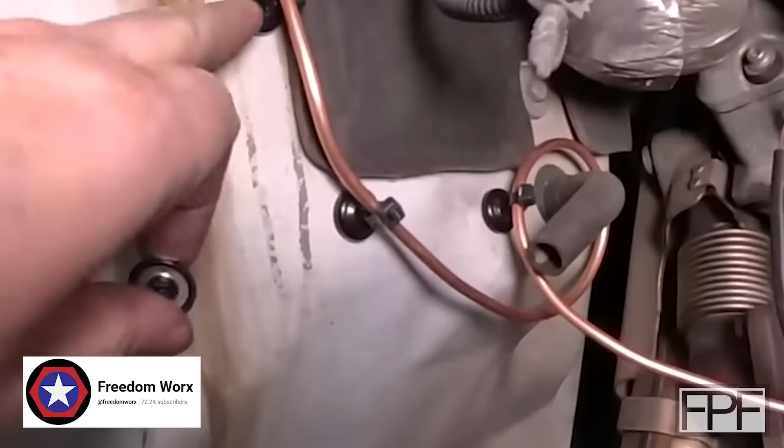These are really nice for plumbing and wiring. I'd like to share this with folks. It's a rare earth magnet with a loop on it for a zip tie to go through. So you can just stick it to the body of the frame, put a zip tie on there, and you're good to go.

So when I first saw that clip, my first thought was, I got to get some of those. I didn't even know those existed. And I like the idea that they're reusable as well. Now, he goes on to say that they're about $1 a piece, which isn't super expensive, but if you want 15 or 20 or 50 of them, obviously that's going to get kind of pricey. And while the magnetic base is reusable, you're still snipping the zip tie every time that you want to reposition one, or reuse it for something else.

And one of the reasons I liked that design is that you can cinch the zip tie on it, so the wire can't slip through it either. So if you're trying to temporarily route a wire and you don't want to have any slack in it, they'd be great for that. But again, even to move it on the wire, you're snipping that zip tie and using another zip tie. It's also sometimes tough to snip those zip ties on real thin wires without damaging the jacket on the wire either. So I thought, wait a minute, I think we can make this, and I actually think we can improve upon the design.

So I was thinking, what if we had a cylinder as a base that had a magnet in it, and it was threaded, and we had like a cap tightening on the wire, and we have like a slot through it for the wire to pass through, that you put the wire in place and then thread the cap on. You could tighten it down on the wire to keep the wire from slipping through, and to get the wire out, you just simply unthread the cap, take the wire out, and you can reuse the whole thing.

So in the early stages of me designing something, I will often just grab my digital calipers to just kind of help visualize the size of something. And I think the size of this is probably around, I don't know, maybe 15 millimeters. That's probably a good size. I don't think I would want to go smaller than that.

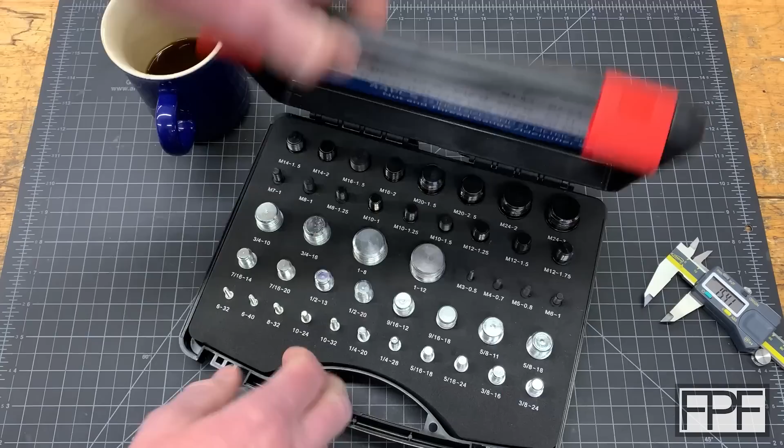And another thing that I will often use when I'm designing is this. This is a set of tools that's designed to figure out what thread something is on either the inside or the outside bore. So they're threaded on the inside and they're threaded on the outside. And these are not that expensive. I will link to the one that I have.

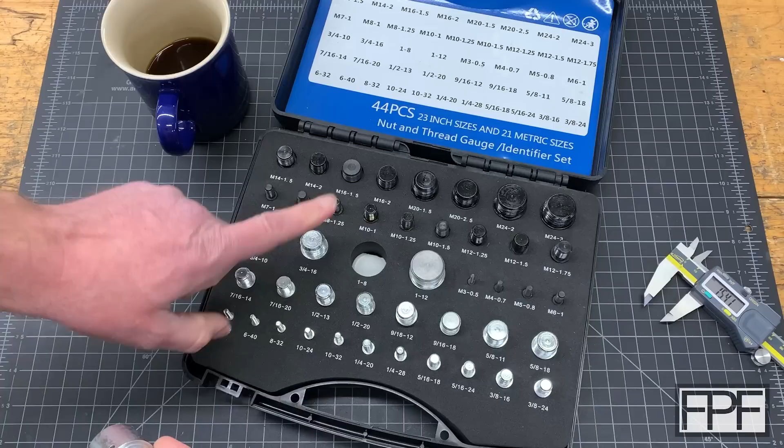I'll warn you, there's sets of these that look almost identical to this that are colored. Don't buy one of those. They're anodized aluminum, and aluminum tends to gall and or be damaged if you're using it in steel. This set is stainless steel, and for whatever reason, this set's actually cheaper than the aluminum ones. It'll often help me just visualize what thread I want on something when I'm designing it.

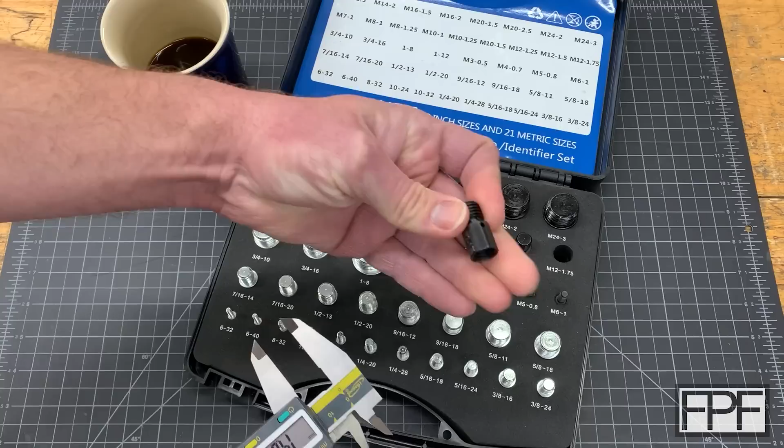So in this case, let's see, we're saying around 15 millimeters. So let's see, M10. Yeah, we could probably go bigger than M10. Let's try M12. That's a fine thread though. Let's go to a coarse thread, M12. Yeah, I think that should give us enough clearance for the threads and still have a nice thick wall. Actually, flip it around. What does this measure? Yeah, it's 14. That's probably enough wall thickness.

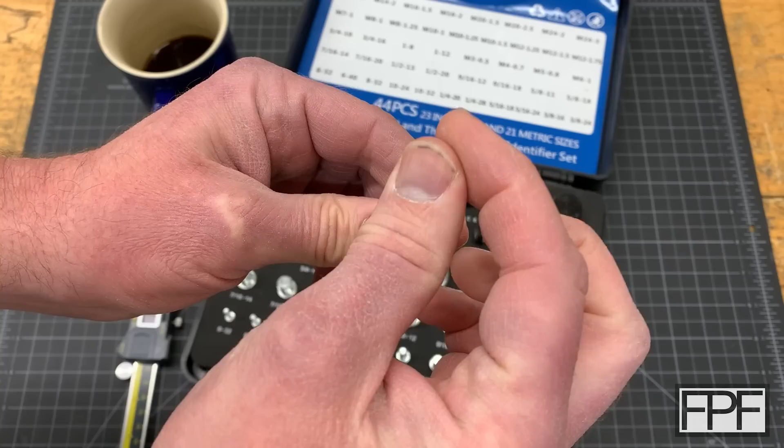So we could probably actually pretty much copy sort of this portion. So yeah, this actually helps us visualize it even better. So imagine the base of it, forget about the threads down here. The base of it is basically like this, except it has a slot down through it on this side and this side, so that you put the wire down in there, and then the top of it is basically a cap that's threaded like this.

The thread's down in and holds the wire. Yeah, I think that'll work. And then, yeah, we could actually press the magnets in. I was kind of thinking we'd have like a bore on the bottom face, press the magnets in from the bottom, but the reality is I have some 10 millimeter magnets. I think that's the biggest I have.

Yeah, so the inside dimension of an M12, like inside the thread, so not the outer thread dimension, the tops of the threads to the tops of the threads on the other side is over 10. So we could have a bore at the bottom that was 10 millimeters in diameter to press magnets into, and that should work just fine.

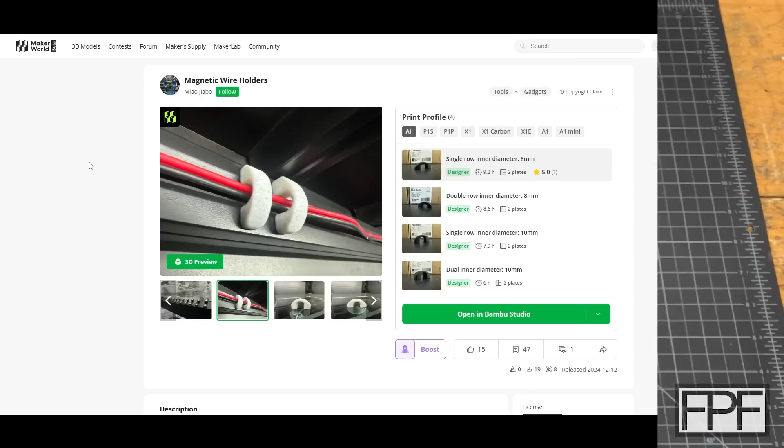So whenever I have an idea like this, one of the first things I'll do is actually just go out and see what other people have come up with, because a lot of things we do in this channel are really specific to a certain use case, but this one really not so much. I could see using these for all sorts of different things. So I took a look on MakerWorld, and there is a bunch of different designs that are somewhat similar, but none of them are exactly the same thing.

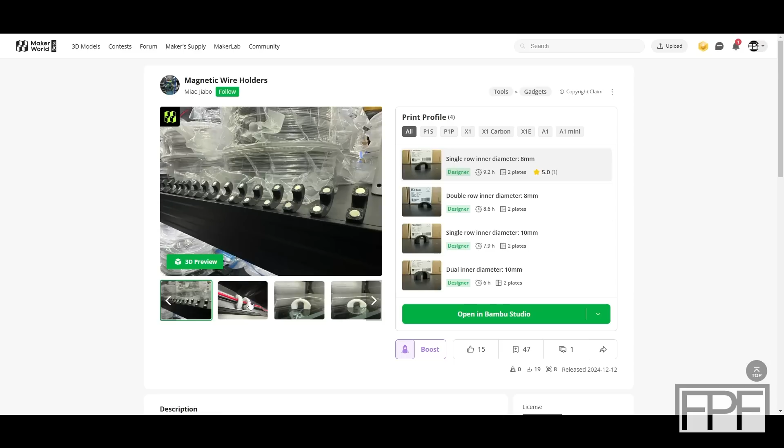This first one, I do like that it's very low profile. So it has sort of a horseshoe shape, shallow, and I think these are 6mm magnets in here. It looks like they're either just pressed or glued into place. The thing I don't like about this is there's no way to actually clamp the wire into place. So there's nothing stopping the wire from sliding through this left to right.

I would like something that is going to keep the wire from moving around. So for example, if we have plenty of extra wire over on this end and we're trying to keep it away from something over here, I don't want to be able to pull a loop through and have it hang down.

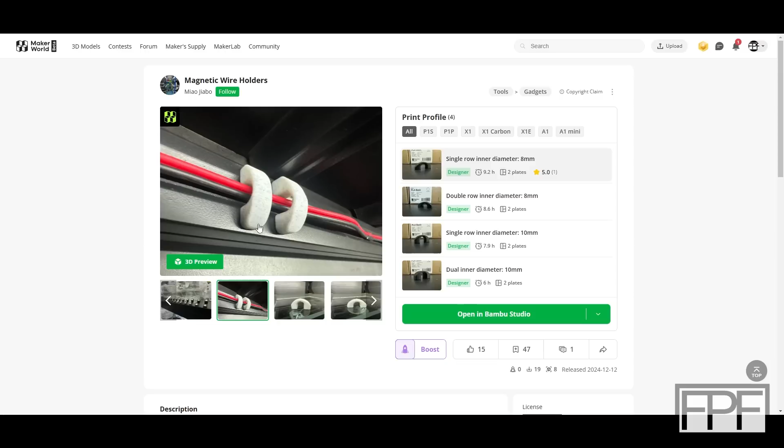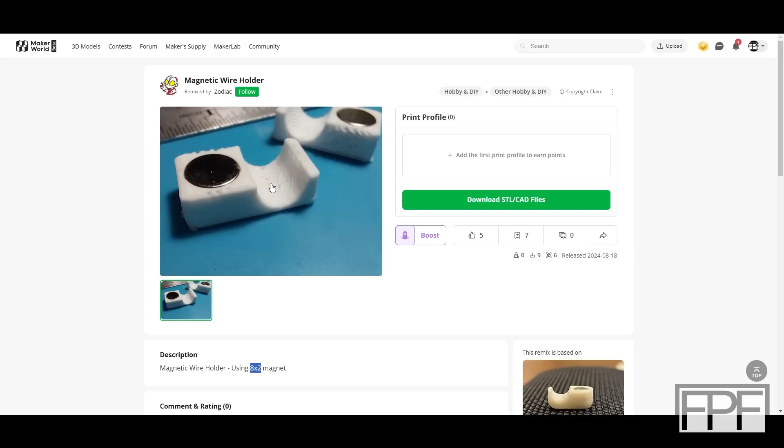This one is kind of the same concept, but just a single magnet. This looks like an 8x2 magnet. Also kind of a neat design, very low profile. Same problem, it doesn't actually keep the wire from sliding through. And with a single 8x2, probably not a tremendous amount of strength for either one of these.

This one is kind of neat, also pretty low profile, closer to what I was thinking. And it looks like it's designed for a specific wire size. This is a 5x2 magnet, a single one in here. Looks like it's probably pressed in. It's on the build plate, so it's a little hard to see. I'm assuming there's just a bore on the underside of one of these to press the magnet into.

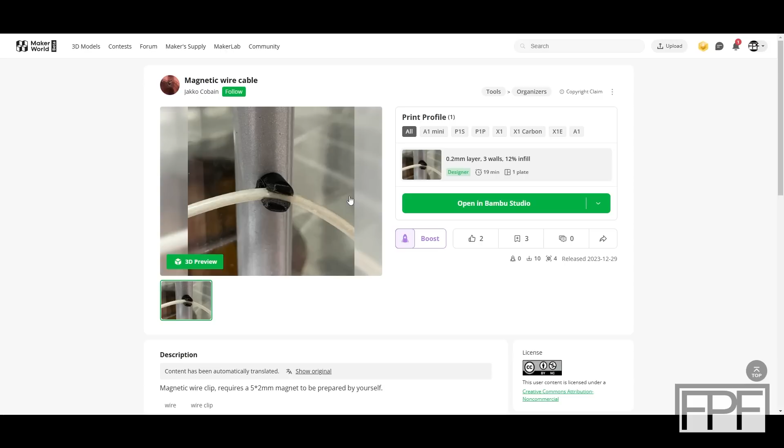And then I guess we would need a design for each size wire so that it kind of clamps in there and holds. So this one would keep the wire from slipping left and right, which I like, but we'd need a separate design for every single wire.

Now, when I first clicked on this one, my initial thought was, oh, this is perfect. This looks like exactly what I was thinking. I don't need to design anything. But this one actually suffers from the same problem as the other ones, and I don't know if that was intentional in their design or not. If we open up the 3D preview, at first it looks like, okay, our wire goes through and then we clamp down on the wire with this cap.

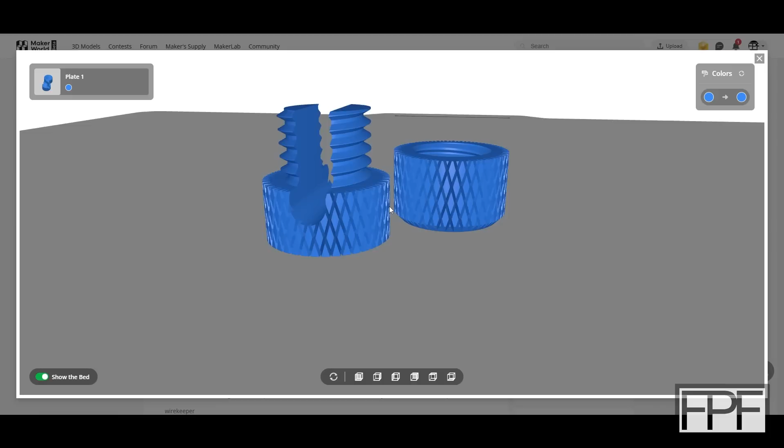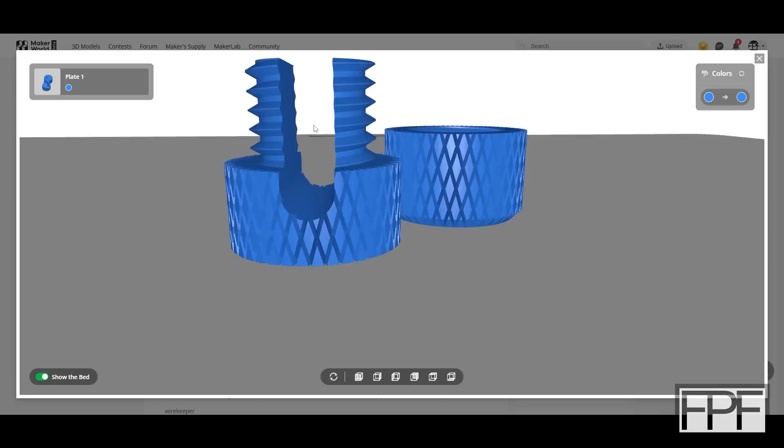But if we look at the width of the bore that makes up the bottom of this slot, if we put a wire in that is smaller than this bore, the face of the cap here is going to hit this face here and never tighten into the wire. And even if we put a wire in that is as wide as this will permit, so imagine a round cross section of a wire, if it fits through the slot down here, it's still not going to extend past this face here, so we're never actually going to tighten down on the wire.

Now I thought, oh, I could modify this. I could adjust the geometry of that slot, bring this up a little bit so that, imagine this curved face down here instead sits up here or sits all the way up here.

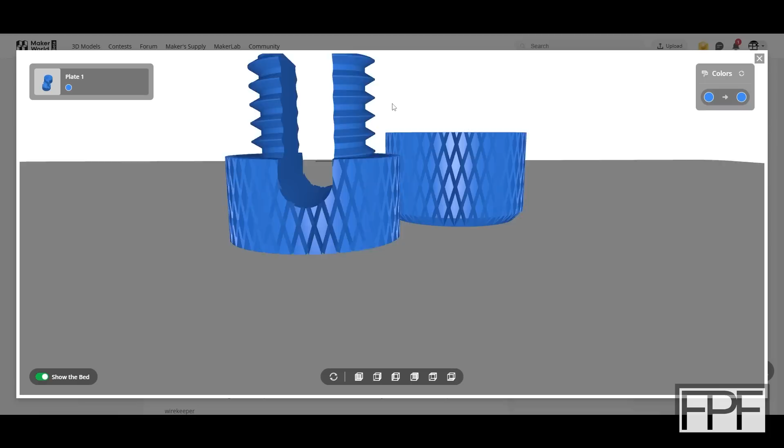Maybe we don't have that curved face until down here, so we don't actually have anything through this geometry down here. But if we do that with this design, this outer face here is going to press on the wire on this side and this side on not a whole lot of surface area, and we're going to be pulling it this way over here and pulling it this way over here,

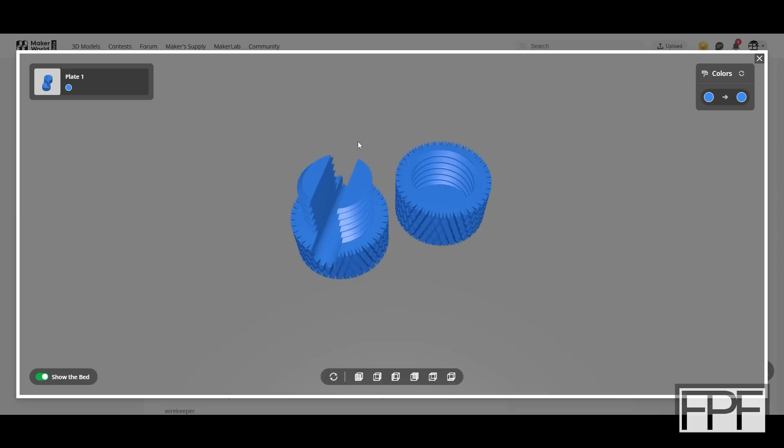which I think has a higher chance of damaging the wire versus doing this in reverse, which is what I was thinking, where the base has the female portion of the thread and the top that tightens down is the male thread, and this would be a solid face up here. So we'd be pushing on the wire, clamping it in place with this whole solid face. That should reduce the chance that we damage the wire and also gets rid of our problem of trying to pull the wire one way over here and pull the wire the other way over here.

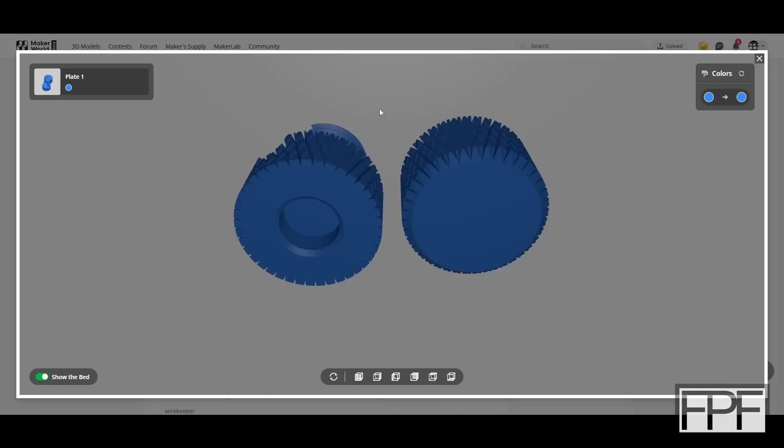I also don't see any reason to have the knurling on the base. So as close as this was, I think it still makes sense to just design our own from scratch. They also used a small single 6mm magnet, probably working around what they had. There's a lot more real estate here. I want to use the biggest magnet that we can, and we'll put 2 of them in there. We're going to use those 10mm magnets. So, all right, let me get started on the design, and I will bring you guys back.

All right, and here's where I'm at with the design for this so far. And yeah, it's incomplete, but there's a reason why. I'll get to that in just a second, but let me show you where we're at so far. So down here at the bottom, we have a bore for 2 of those 10mm magnets to get pressed into. And up here at the top, we have M12 thread for some kind of cap to screw in here to hold our wire in place.

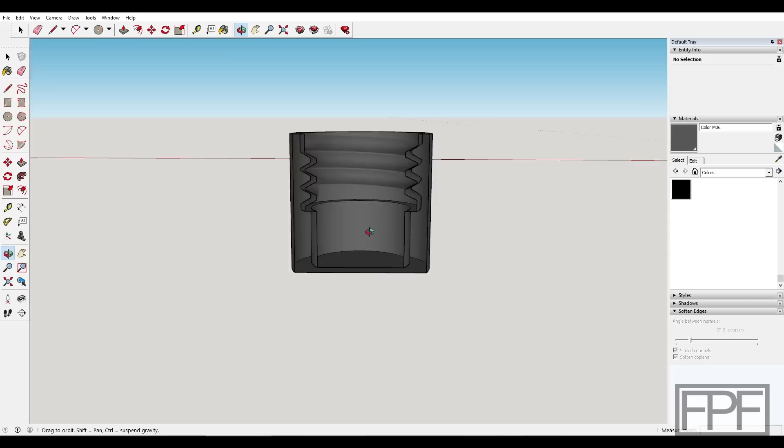It's probably a little easier to understand if I turn on a section cut. Yeah, there we go. So this is the bore down here at the bottom that the 2 magnets stacked are going to press into. You can see we have a small gap down here. This is 0.5mm from the bottom face of the bore for the magnets to the bottom face of our actual total part.

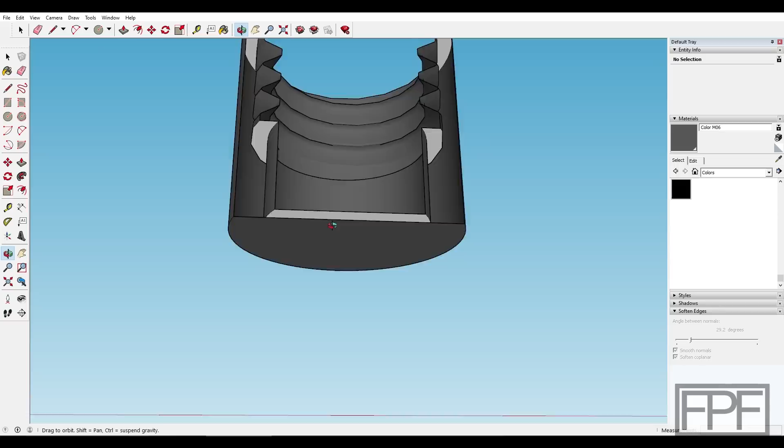And that 0.5 millimeter should not affect the magnetic force too much, but will make it really easy to keep the bottom of this guy clean, particularly if we're using it in an area where we're generating metal dust or metal chips, something like that. And then up at the top, we open up into essentially a wider bore with that M12 thread. Now, you're probably noticing we're missing that slot that we actually want to put the wire through.

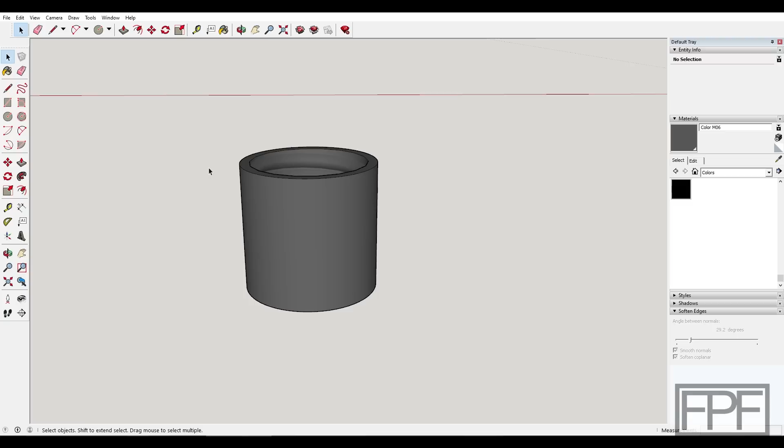And this is a great opportunity to show you guys how easy it is to modify models that maybe you've generated in a CAD program that doesn't give you the easy ability to do that. It is, in this case, quite difficult to have a nice clean mesh going through threads because there are so many faces on these threads. But let's just say that this is a model that you grabbed off of MakerWorld or Thingiverse, whatever. And it works for you perfectly aside from maybe one small problem.

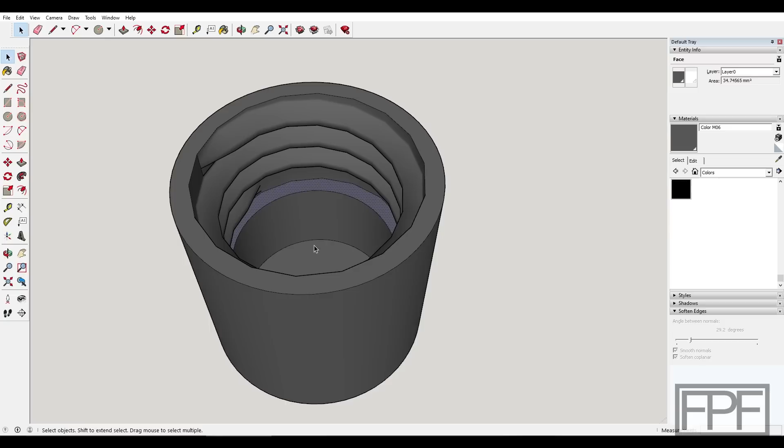In this case, we want to put a slot through this. And that slot is going to extend all the way down to this face down here, basically the top of that bore. The wire should be able to pass through a slot here that sits all the way down to where those magnets are pressed into the bore, and then we screw the cap in and hold the wire in place. It'll make more sense when you see it finished. But we can actually do that with some simple objects, in this case, a cylinder and a rectangle, right in our slicer. Let me show you.

All right, so as a first step, I've gone ahead and imported that part as an STL here into Bambu Studio. And these steps are going to be the same with Orca Slicer. If you're using a different slicer from Bambu Studio or Orca Slicer, these steps are going to be a bit different, but you should be able to find these features within pretty much any modern slicer. We're going to be doing all this work at the object level.

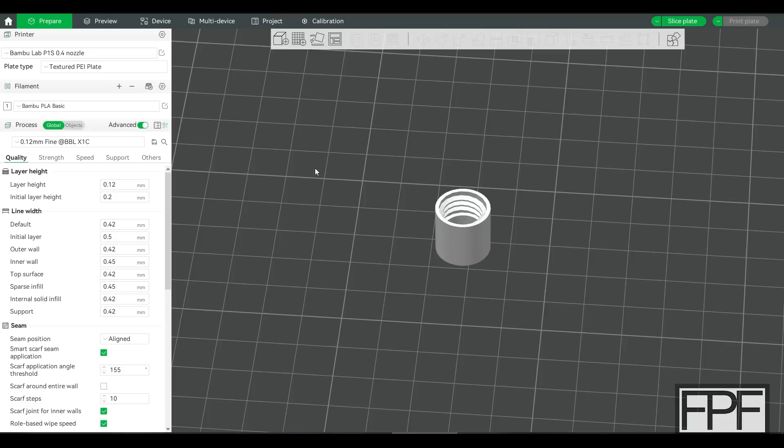So first thing I'm going to do is click on Objects over here. And you can see we have just a single STL. That is this guy right here. So the first thing we're going to do is add some other pieces that we can work with here in the slicer. So I'm going to right click on this and I'm going to hit Add Part, and we're going to add a cylinder. And by default, it kind of sets it down right next to our first part here.

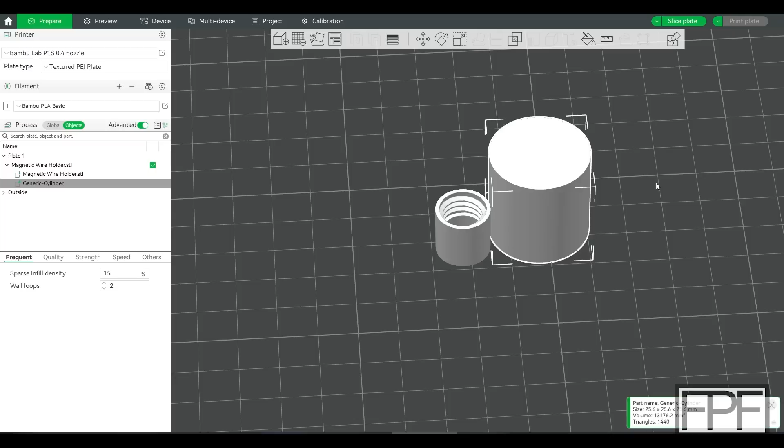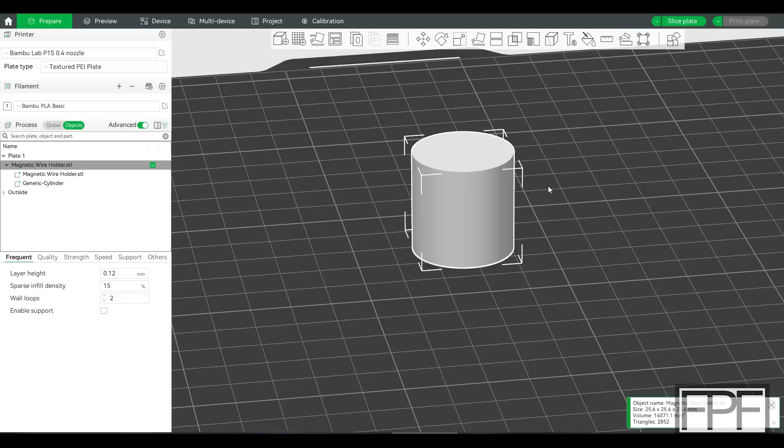So if I click on this and we check our position, if we just set our object coordinates all to 0, should get this guy down in the build plate centered up in the exact same position as a first step. Now we need to make this guy the right size because remember, we're going to use these other parts that we're adding to modify our original design, this Wire Holder.stl.

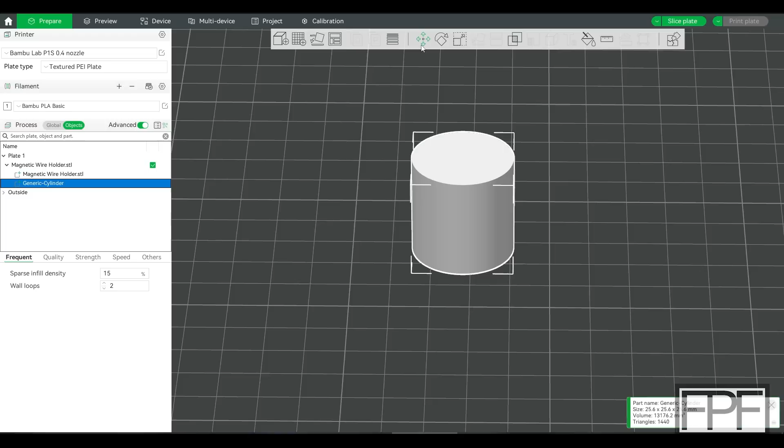So if I click on this guy, you actually got to be really careful here because anytime you click on any part, they're on top of each other now, so it's hard to tell. It selects everything by default. You've got to make sure you have just the piece that you want to modify selected. So I'm going to click here on generic cylinder, and now let's go to scale. And you want to make sure your uniform scale is turned off, and we want to set our X to be 5 and our Y to be 5. That should give us the right dimensions for that slot.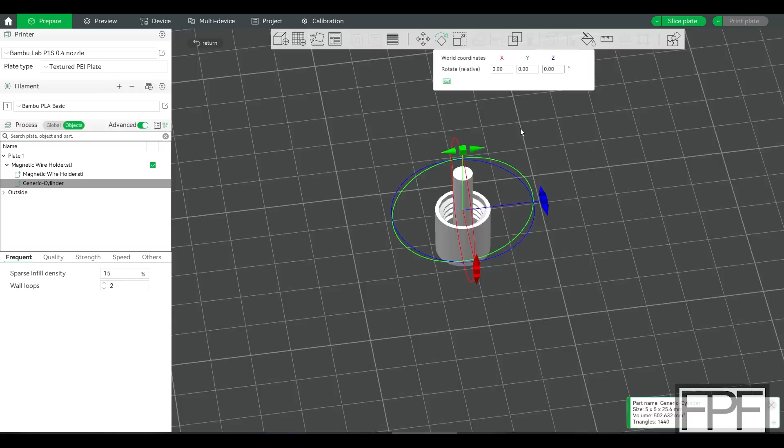Now you'll notice it's not in the right orientation. We can fix that pretty easy. If we just go to rotate, see, we can either rotate this, I guess, in the X or the Y. We want to turn it 90 degrees. Let's do the X. Okay, that is starting to look better, but it is too high. So again, making sure we have just the object that we're trying to modify selected. Let's see, we want to move this.

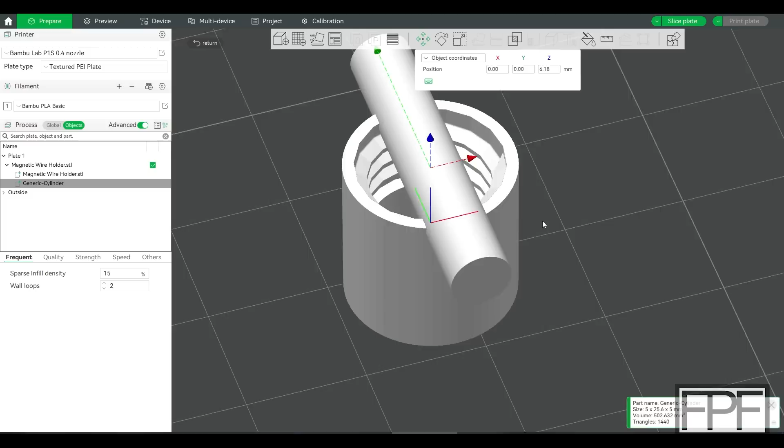We realistically want the bottom of this to sit right at the top face of that bore at the bottom for the magnets. And let's see, we had 0.5 millimeter and then 5.5 for this bore. So we want this to sit right at 6 millimeters, but the object itself, the coordinates are going to be from the center point. So we need that to be at 8.5, I guess. Let's try that. 8.5. Now that is still too high. You know what? I think we need to actually set that in world coordinates for the Z. Okay, that looks like it's at the right spot.

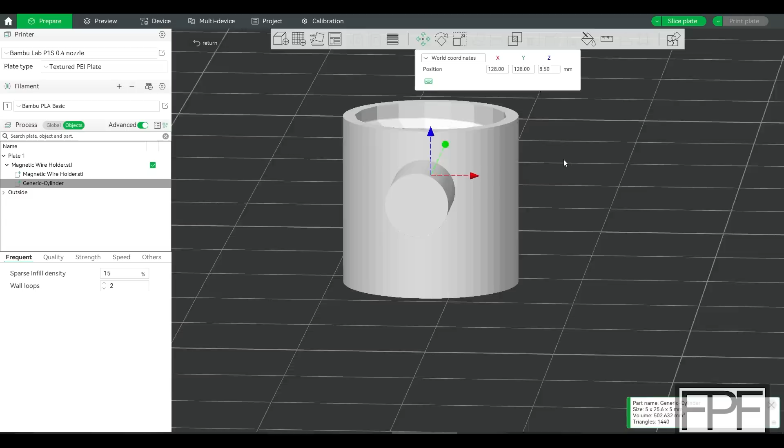An easy way to tell is actually just to slice it. And if we go down, we can see, okay, there is our top face of that bore. And yeah, the very next layer starts our other part. So that looks good. Now, we don't want just this area down here to be cut out. We want to cut out this area up here as well, but that's okay.

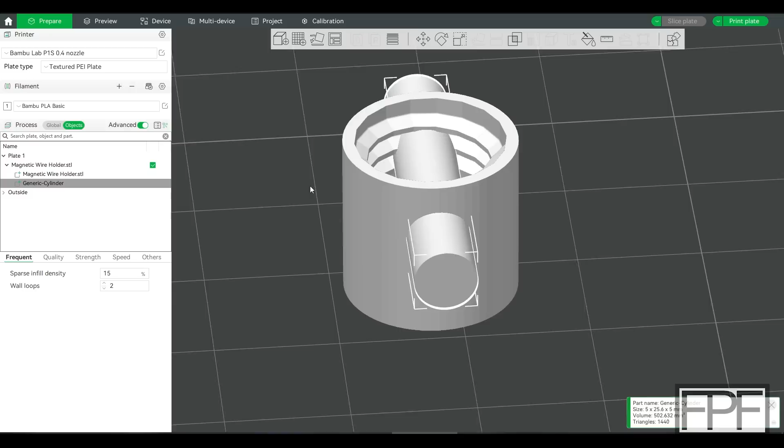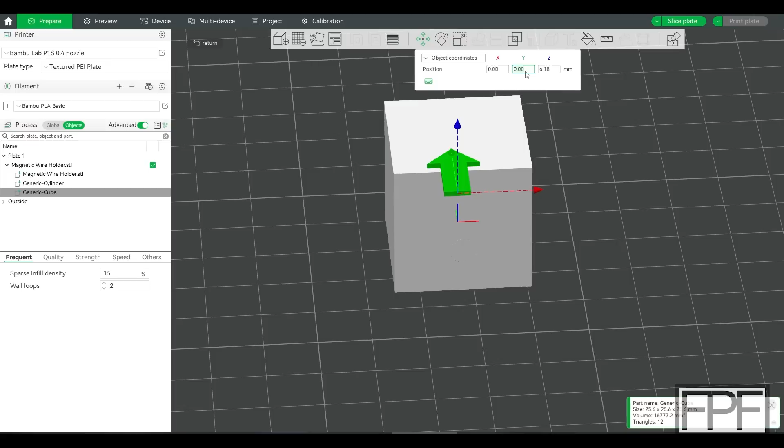We can do that. So if we click on our wire holder again, right click, and actually we got to be up here on the STL, add part, we'll add a cube, and we're going to start by doing the same thing here. We'll set our object coordinates to be 0 on the X and the Y. We'll go to scale, and we want our X to be 5. Yeah, that looks right. Now, it's not in the right spot, but that is okay. We could do it with the coordinates here, but this is one we actually don't need to be that perfect on.

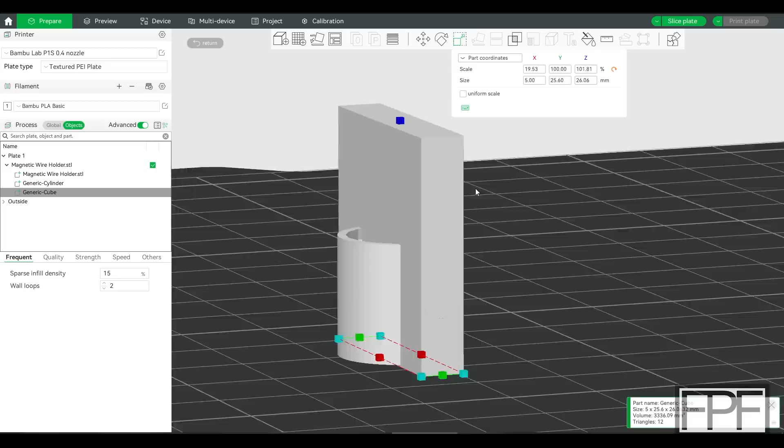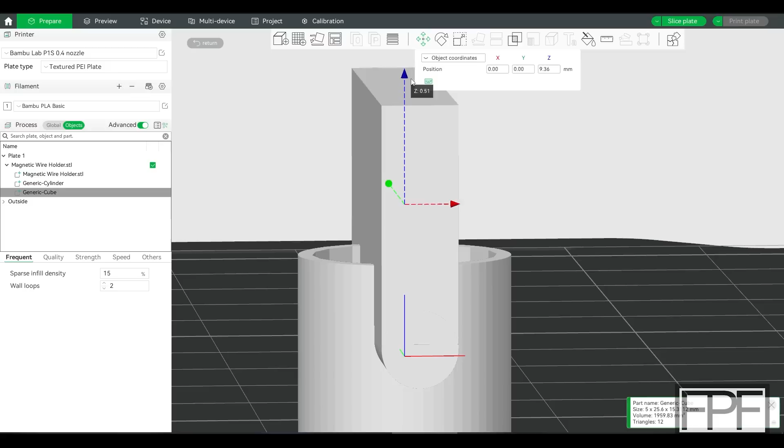Let's see, Y is, oh, we're still on scale, that's why. So we want to go to move, and I can actually just drag this guy, get just the cube. This is one we can actually do visually. I mean, we could figure out exactly what number we need that to sit at, but you see anywhere sort of in this region here is probably going to do it for us. And this is another one, again, we can verify just by slicing it.

And we can see now we have, because the accuracy is only within the line width and the layer height, so we can see that we are right on. There's no steps on either side here. Now I hear what you're saying. That's not what we want to print, Rich. That's not going to work for us. We essentially need to knock out this.

Imagine if this was the tool path, and say if we were machining this. So if we go back to prepare, this is where the magic happens. I'm going to click the whole thing. So now we do want all the pieces selected. And we're going to go up here to Mesh Boolean. And we want the difference between two of these parts.

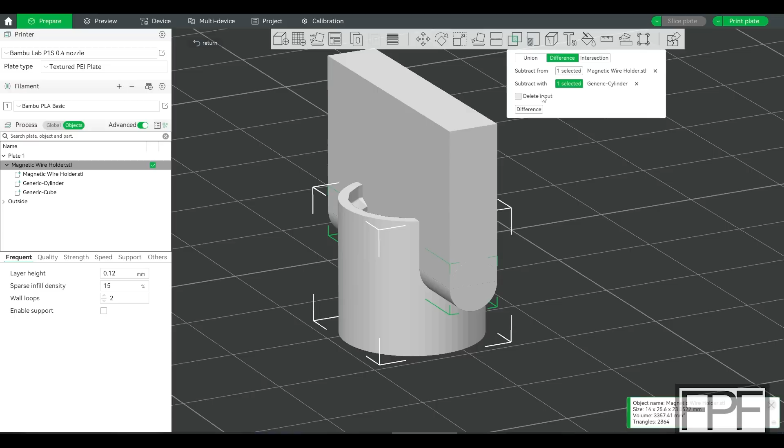So subtract from. This is where we're telling the slicer what part we want to have less of, basically. So we want to have less of this main one down here. So if I click on this, it actually shows us the parts. That's perfect. And subtract with. So this is what part are we using to make the subtraction from? So we're actually going to do this twice because we need to use the cylinder and then the cube as well. So we want to make sure we turn on delete input.

Click difference, and look at that. We've already done part of our work here. So we'll just do this again now, subtract from. We're going to subtract from this. We're going to subtract with that cube. We've got our delete input turned on and hit difference. And now that's looking pretty darn good. Let's hit slice plate, just make sure. Yeah, I believe that is exactly what we are looking for.

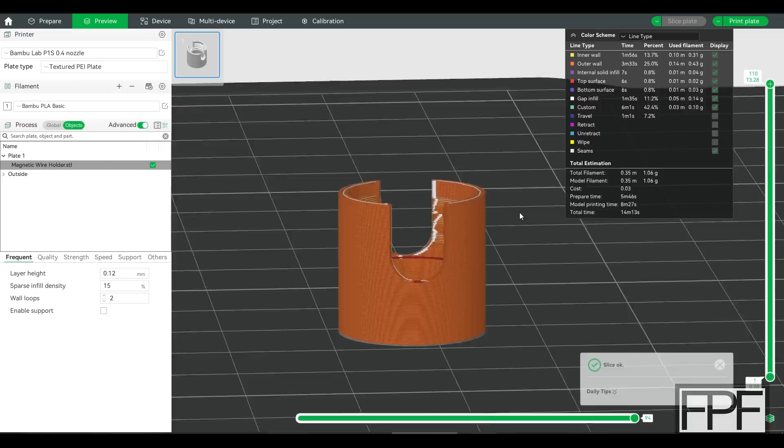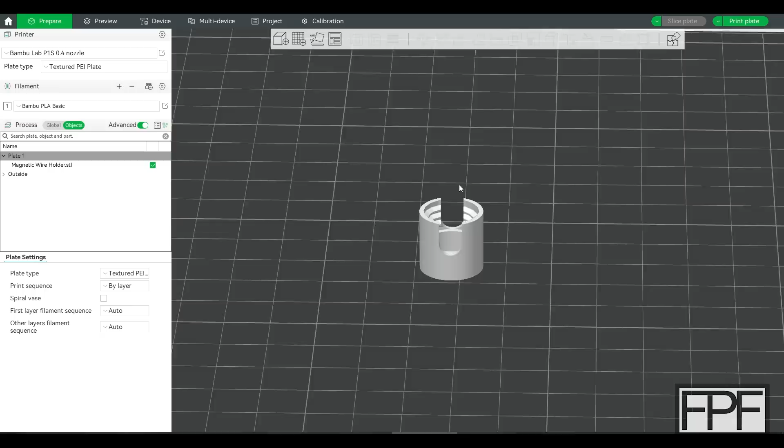Now, some of you might already be opening up a new comment to tell me that you can do that with modifiers and it is a little bit less work than going through the Boolean operations. And that is true to get you, I'm not going to say printable model because it's not really a model. You can print from that, but the magic of doing it this way is you're really kind of doing modeling within the slicer, which allows you to now click this and go to File, Export all objects as one STL.

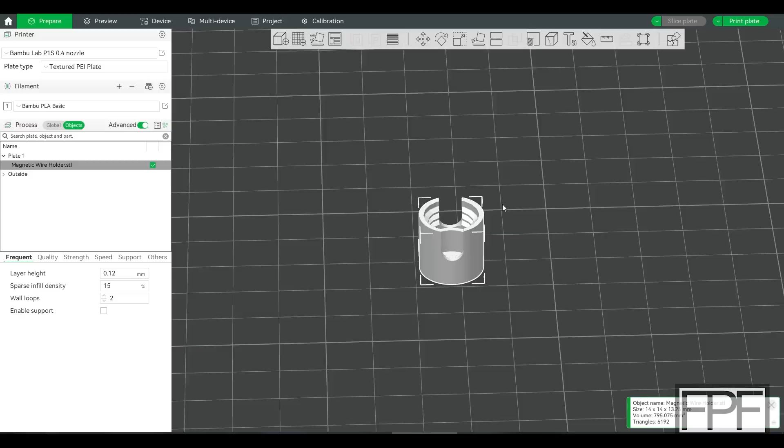And let's see, here's what we imported, this magnetic wire holder. If we go and we add, call it fixed. Now if we add that, look at that. That's actually an STL. That's not like a saved file here in Bambu Studio that we could print from again. That's actually what the STL now is. It is the modifications built into the model, all as one solid part.

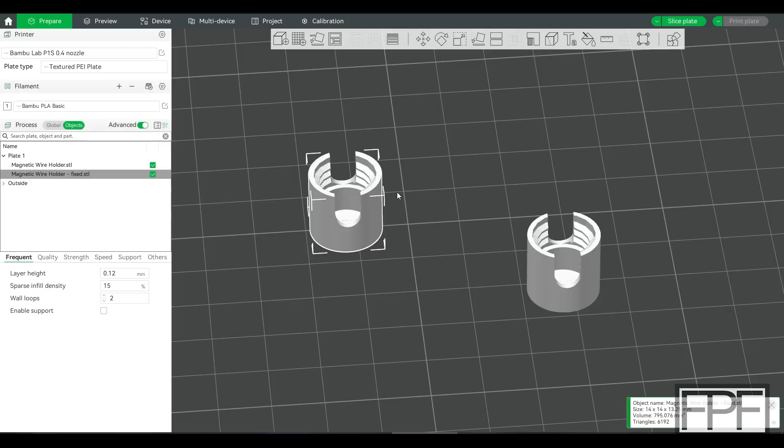So that enables me to share this with you guys. Or you guys, if you're using the slicer to make modifications like this as well, you can actually get that exported as a solid part and share it with other people, and they can print that versus you trying to share your slicer settings and everything all in one shot. It gives you a solid model that you can export.

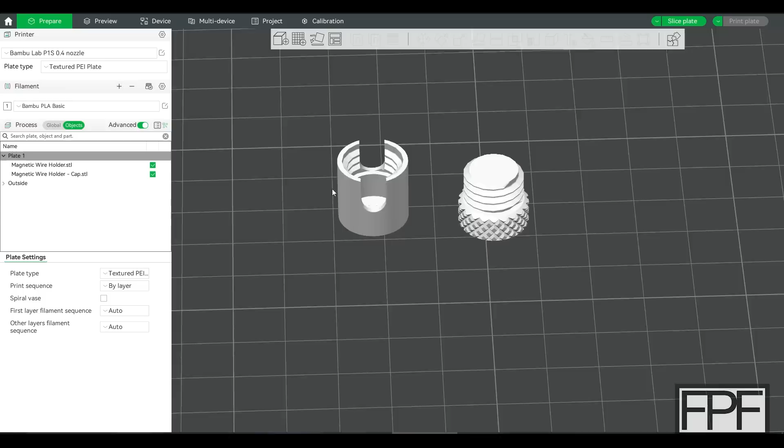So I have already done the same thing for the cap. So I'll pull that in, and now you guys can kind of get an idea here of how this is going to work. This guy's obviously going to be flipped over, and it'll thread into the top and should then tighten down on whatever wire we're passing through here. And the magnets will press into the bore down here.

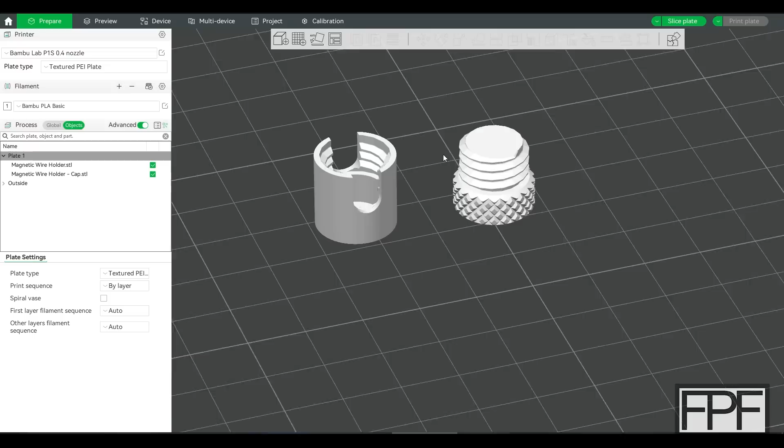So another thing worth noting, when you're doing threads like this, I could print them like this and it might fit. It's probably going to be really tight because both these are a perfect M12 thread that has very minimal clearance built in. And if we were interfacing either one of these with another component that was like a tapped hole in steel or something like that, it'd probably fit just fine, or a bolt would probably thread into this one just fine. But because we're 3D printing both of these and these tool paths are not going to be perfect, we're going to need some extra clearance.

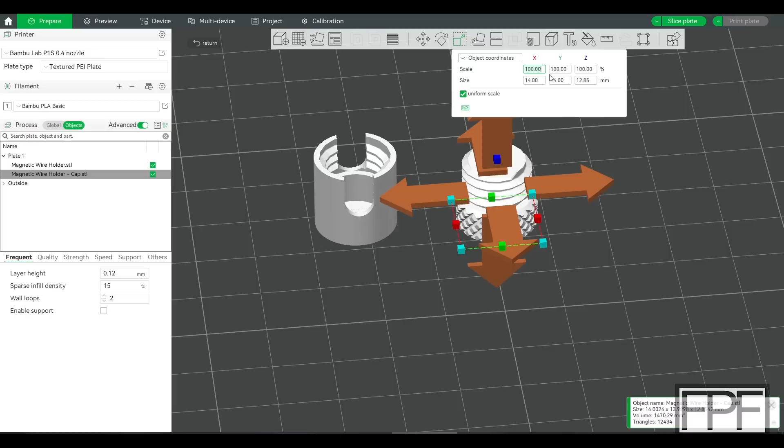So I'm going to click this part and we'll go to, let's see, scale. And now I'm going to turn uniform scale on. And we could just do a percentage. I would start with probably taking somewhere between 3 and 5% off. Let's try 96%. And that's just shrunk that whole thing to 96%, which actually, you know what, now that I think about it, we don't want to do that because we don't want our Z to change. That would actually change our thread pitch.

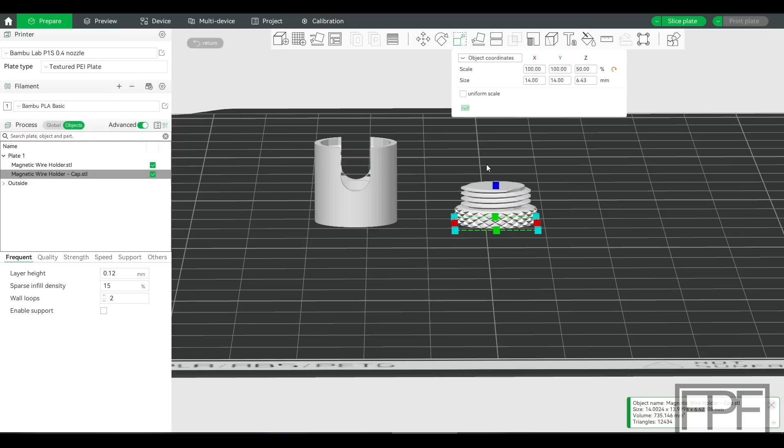So we want to turn uniform off. We want to leave Z alone because think about it, if we shrunk that down here, I'll exaggerate it. Yeah, we have now a completely different thread pitch that's not going to align with this guy. So we don't want to do that. We want to leave that alone. But we do want to change X and Y.

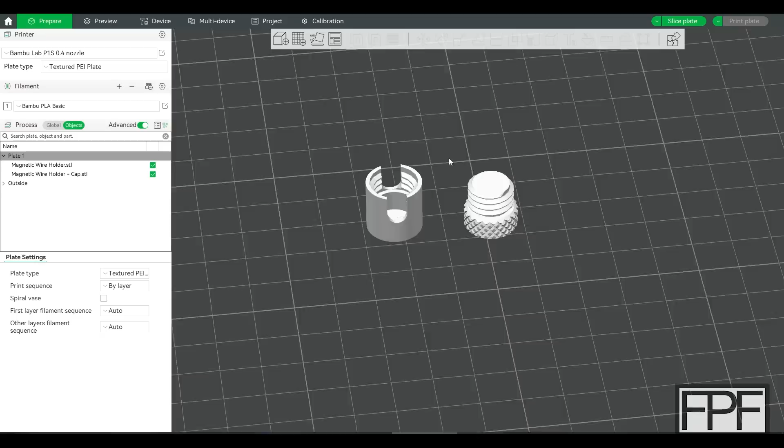That's going to change our clearance for this thread. So we'll make this 96%. Now you can see that has shrunk in the directions that are going to control our thread fit, but it's leaving our thread pitch and the overall height of this alone. So, all right, I think it is time to print this and see if our magnets are a good press fit and see if these parts actually fit together.

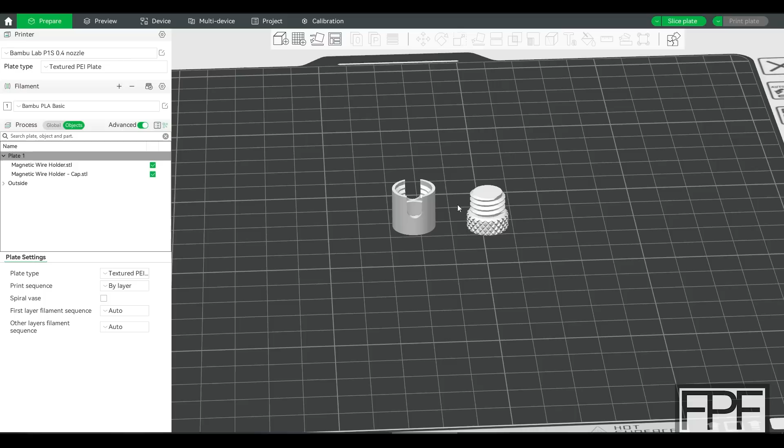So it's tempting to print a bunch because I do want more than one of these, but whenever you're printing components that are designed to fit together, don't do that. Print one, make sure it fits before you start filling up the bed and creating a bunch of waste if they don't fit. So I'm gonna do just that. I'm gonna print one of each of these and I will bring you guys back.

All right, and our test pieces are done. Let's see how these thread together. It starts nice. It's maybe a little snugger than I'd like, but I don't want to loosen it up anymore because I don't want this to free spin either. Like I don't want this to vibrate off if it's on something that's vibrating like a machine tool. And I actually can't tell if it's bottoming out on the face up here or bottoming out on the face down here. It looks like it's really close, so that's just perfect.

And if we open this up, I want to see that we're going to have in the vertical direction as much clearance as we are in the left to right before this falls out. Yeah, that looks like we probably have the full 5 there, and that's still grabbing on. So that should work. It's close though. Actually, that was only like another quarter turn. Let me go grab a couple things to try this with and make sure that that's actually going to work before we keep going.

All right, I grabbed a bunch of stuff to try that I could see using this with. So this is one of those real thin wires for temporarily connecting something together for testing. Yeah, that fits no problem. Really, I just wanted to make sure that it clamps even a small wire like that. Yeah, that's on there good. The other thing I thought is I could see using this for PTFE tubes, just for kind of keeping your lines out of the way. So yeah, that fits just fine.

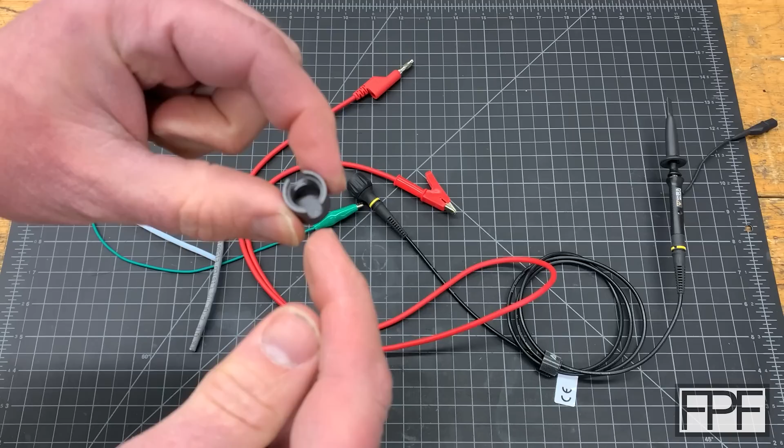So, all right, I think the only thing we need to make sure now is still good is if we can press 2 of the 10mm magnets down in that bore. Let me grab the magnets. All right, here's 2 of the 10mm magnets. Now, I think we could probably press this in with the threaded cap, but it's going to be tricky to keep it straight. So you probably could do that if you're making one of these for yourself, but I have an arbor press, and that I know is going to press this in dead straight. So let's go over there.

All right, this is a 1/4 inch punch, but anything metal that is smaller than the diameter of the magnets would work. I say metal because it's nice that you can actually just put the magnets right on it like that and they'll stay in place, especially when we're trying to get them down inside a bore like this. And if we get this nice and vertical here in the arbor press, this will ensure that we're pressing these in perfectly straight.

Yeah, it's a nice press fit. It's a pretty good amount of force that it holds with, too. I think that's going to be good. All right, now that we have the magnets in, let's just try this again with our largest diameter wire. This is right at 5mm, just to make sure we don't have any interference there that I'm not thinking about. No, that still fits just fine.

In fact, we probably shouldn't have even tested it without the magnets, because especially on the smaller wires, it's almost kind of trying to slice them. But now we have a flat bottom all the way across. So that works nice. All right, let me print a couple more of these so we can actually try it out and see if we can route a wire around temporarily on something.

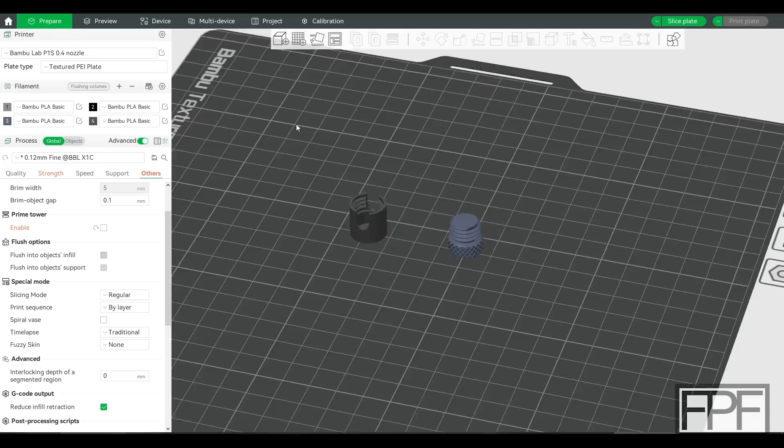So now that we know that everything fits, I want to go ahead and print a quantity of these out. And I'd like to stick with these 2 colors as well. I thought that looked nice, the contrast between the 2. So I want to show you 2 tricks here. And I bet you the first one, almost everyone knows about. The second one, I bet only about 50% of the people watching this video know about.

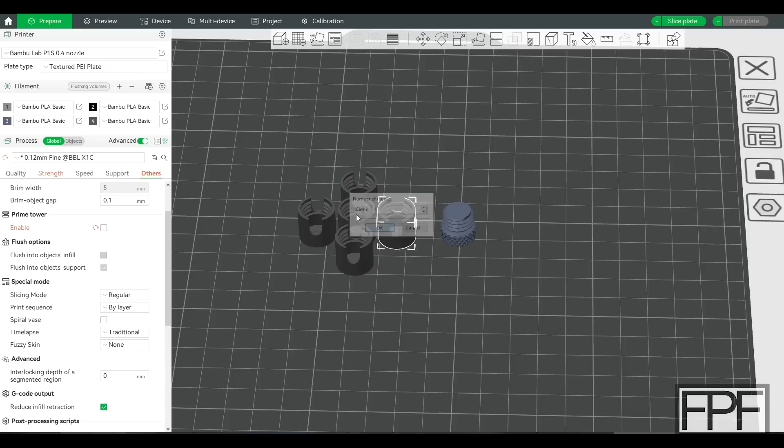So first let's clone these. To do that, we can just right click on it and click clone. And if we hit 4 here, that's going to give us 5 in total. We do the same thing on this guy. Clone it 4 times. Now we have 5 in total. And we can just hit arrange, and that'll clean up our toolpaths so that they're not running into each other.

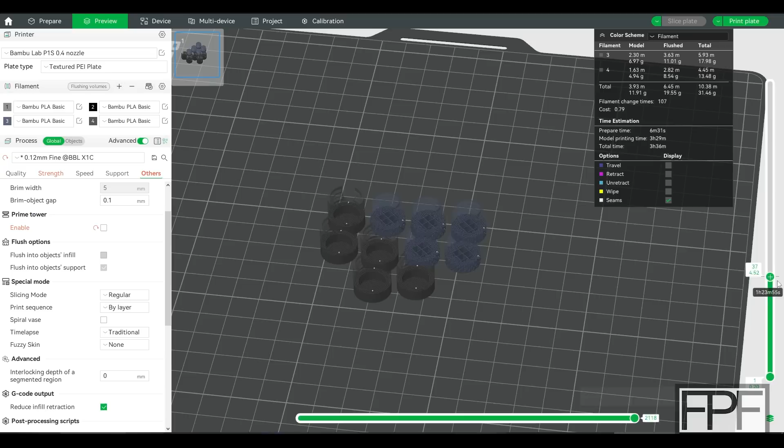And if we slice this just like this, it's going to change filament 107 times, because it's going to have to change for each single layer in this print. And there's 107 layers because I'm doing this in 0.12 millimeter layer height, so we get nice resolution on those threads. Second trick though, if we go to Others in our settings and go down to print sequence, by default this is always by layer, and that is typically what you want.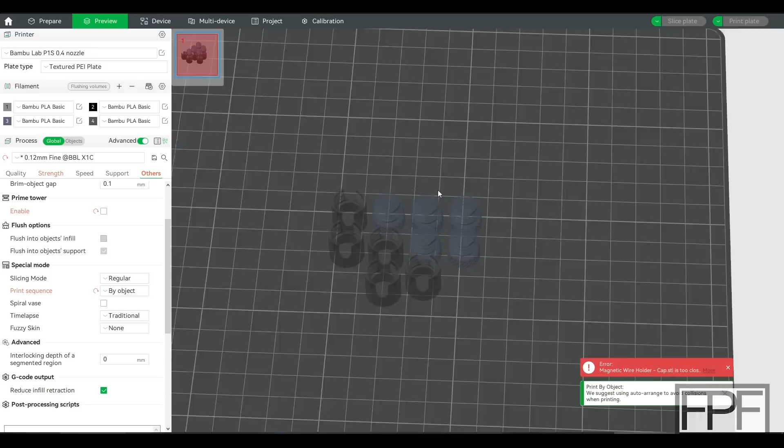However, in this instance, if we make it by object, it can print each entire object in its entirety, and if we arrange things such that it can print all of these gray parts and then all the blue parts, it should only have to change filament once, maybe twice, depending on what color it prints the purge line in. So already now it's complaining that it's too close.

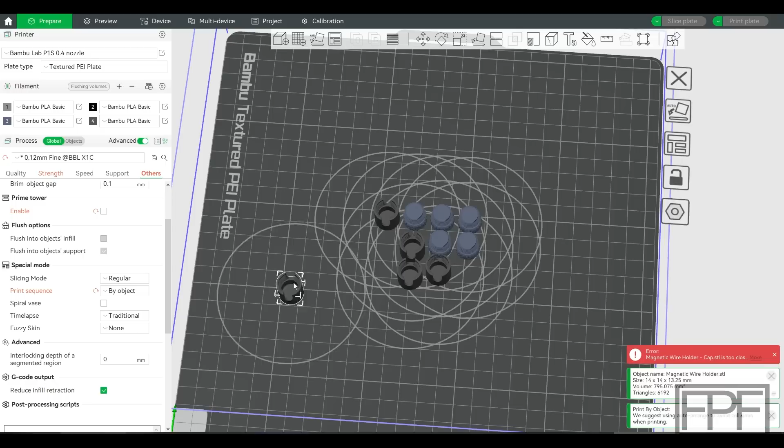Let's see if we go back to prepare. Oh yeah, it's actually showing us now. When we do it by object, it's printing the whole object and then moving to print the next object. So in this case, if it printed this whole object and then tried to print this object, the tool head's going to strike this one. And that's exactly what it's showing us with these circles here. I think auto arrange can actually save us here too. Let's see.

I think that'll work. It looks like it's going to print these first and then these. Let's slice it, it's a surefire way to tell. Yeah, look at that. Filament change times 2. And we just knocked 2 hours off our print time. We can see what it's going to do with our preview slider here. It's going to print all of the blue ones one by one first, and then each of the dark gray ones one by one.

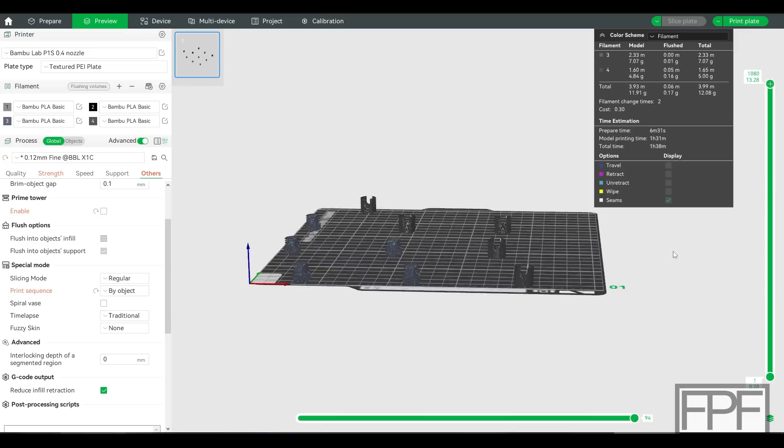So not only is that going to save us a whole ton of filament changes and a bunch of waste, but we're also probably going to get cleaner parts. And that's another instance where I will use this, even if I don't have multiple colors. Let's say I wanted to print 2 of these in the same color, and it's a small part like this, and I know I have plenty of room on the bed to print one in its entirety and move over and print another one, I'll also switch it to print sequence by object.

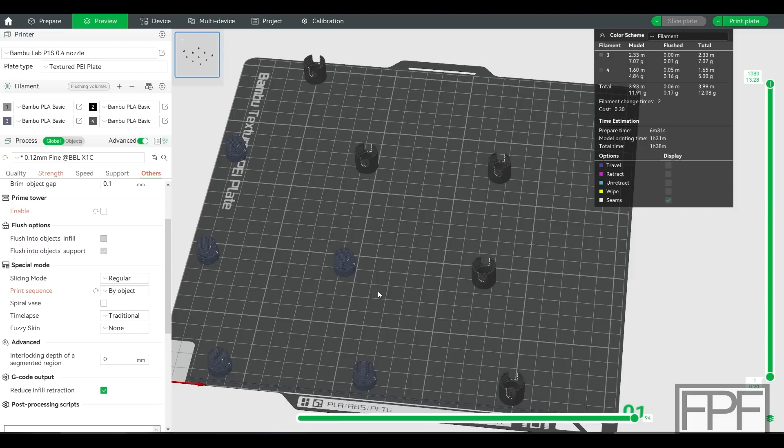Because the toolpaths completely change the moment you start printing multiple objects on the bed, since it has to leave the object it's printing, switch over to another object, retract, come back. So all your toolpaths change. The start and stop points are going to be different. If you do this by object and you have room on the bed, your toolpaths are identical to the toolpath for a single part, even if you're printing a bunch at once.

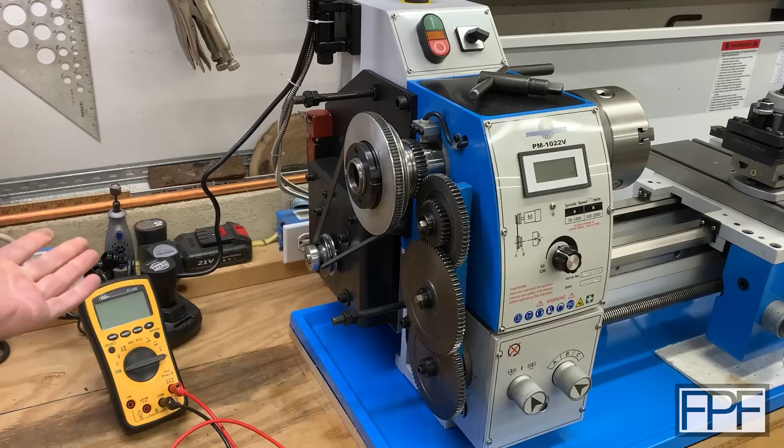All right, I've got all 5 of these done. Let's use the lathe from last week's video as sort of a prop to talk about an example scenario that we could use these for. So I've got my multi-tester here too, and I've got 2 leads with alligator clips on the end. And let's say that I pulled this cover panel off and I'm trying to attach to one of these switches up here to test something. But I need to test it while it's running.

So while this is running, yeah, I'll turn it on. We've got spinning gears, we've got 2 pulleys, we've got a belt, lots of places for these wires to get caught. And yes, I've temporarily overridden the safety switch so that we can operate this lathe without the safety cover on there. Now, I could probably maybe route this over here or something, maybe zip tie this to here, but there's still the possibility that these are going to get sucked in here, which is going to be a real bad day. Give me a second. Let me move the tripod over. Let's see if we can use these to safely route these wires to have this attached while this guy's running.

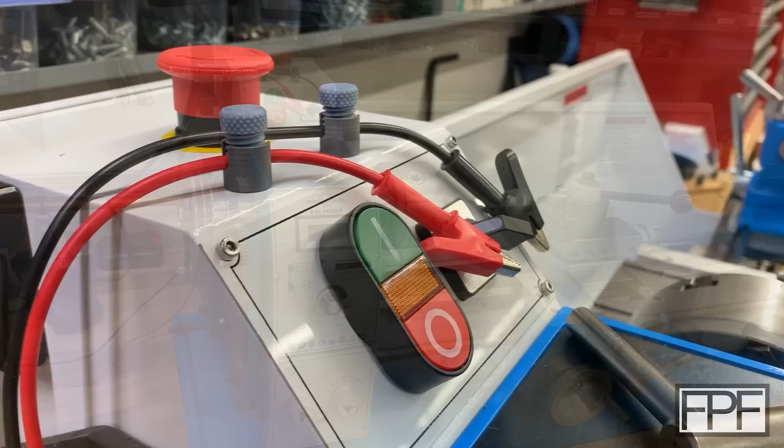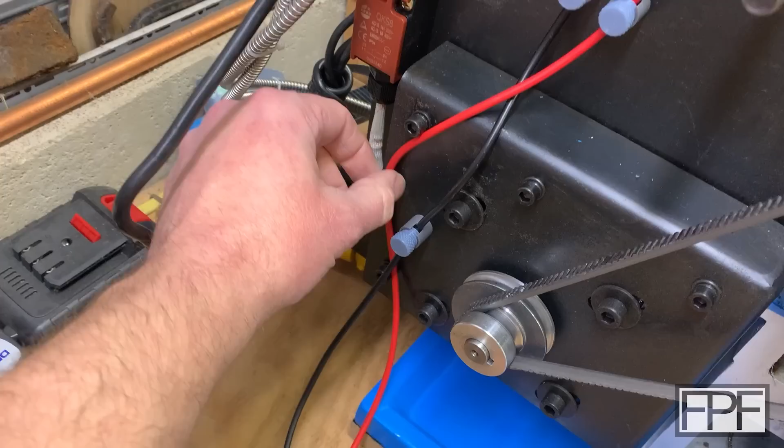All right, well, that worked out great, but even just this simple test, I've already run out. I really should have had at least 6. You can see the last one down here, I only had 1, and I just kind of have the red wire underneath of it. Should probably have not only 1 here, but probably then 2 more down here as well, where it comes off the chip pan, just here in this example, to ensure that nothing gets sucked into our drivetrain. And what's nice is the wires, they're not just running through these, the wire's clamped in there, so the wire can't slip through there.

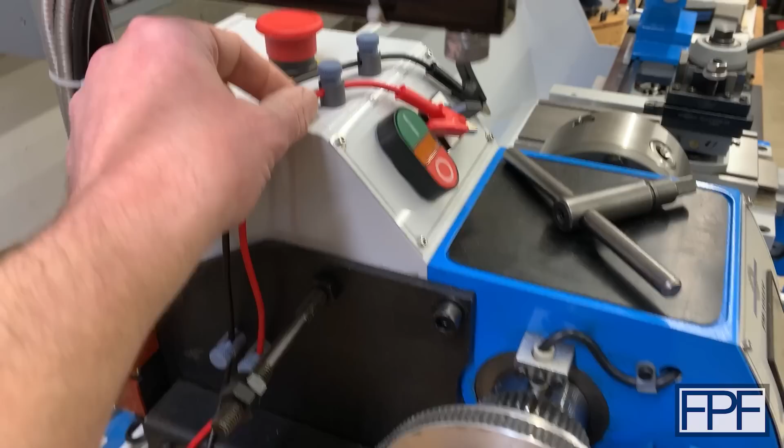If I pull on this, you see the entire thing's going to come along with it, and that's stuck on there pretty good. Those magnets are pretty strong. So I'm really happy with this. It's already got me thinking, since these are 10 millimeter magnets, we could probably just order some 20 millimeter magnets and then do 200% or double the size of these for much larger wires, like even power wires off something.

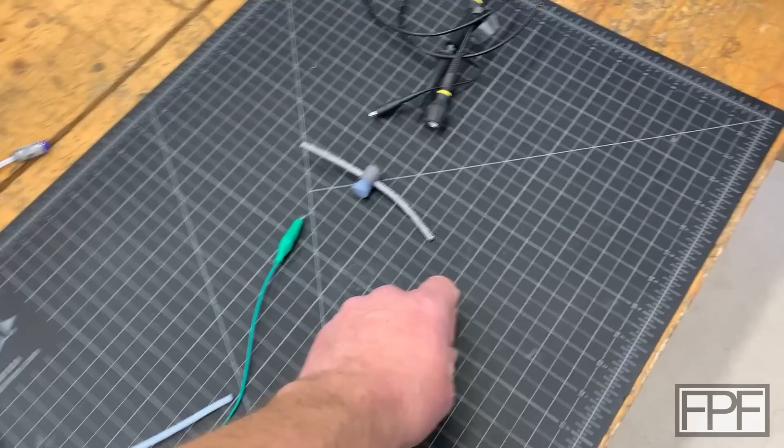All right, I can hear you guys down in the comments telling me to actually turn this on and test it. So this machine runs pretty smooth, but even if this thing was kind of rattling around or something like that, I don't think these are going to go anywhere. They're on there pretty good. Oh, look at that. We did have 6. I forgot about our test one from earlier.